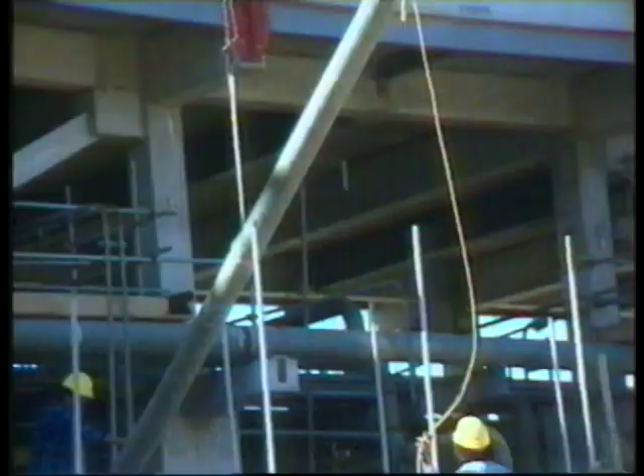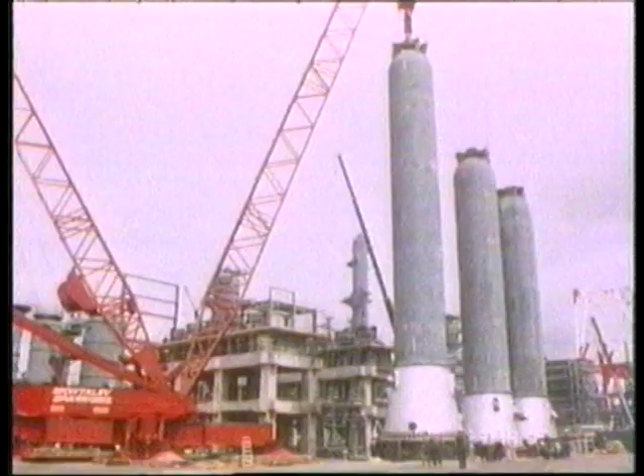A major expansion in 1983 saw a $1.8 billion investment in new plant and equipment. This huge revamp was required to increase the efficiency of the refinery and provide the extra products required by a growing nation. In 2002, the government announced new fuel quality regulations that would bring New Zealand fuels to a standard now required in other countries such as Europe, America, and Australia.

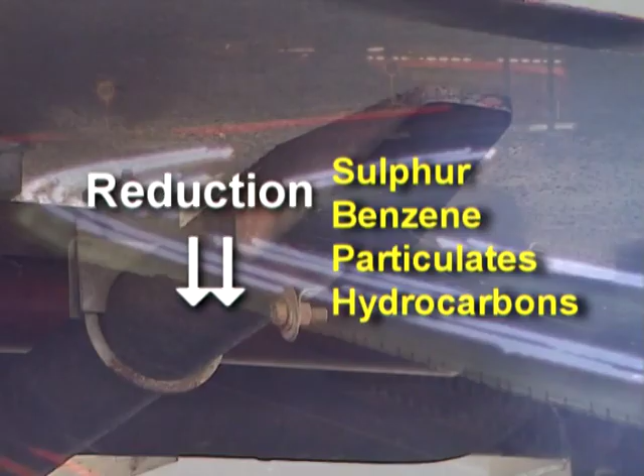The new specifications will apply to all diesel and petrol sold in New Zealand. They're aimed at improving air quality by reducing vehicle emissions into the atmosphere. They'll also allow the use of advanced engine technologies, offering the benefits of further emission reduction and greater fuel efficiency.

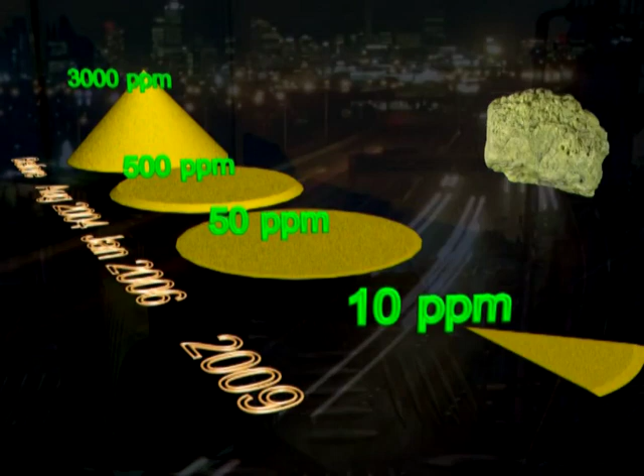The government announced that the level of sulphur in diesel would drop in 2 stages from 3,000 parts per million down to 50 parts per million by the 1st of January 2006. The regulations also contained a provision to reduce the diesel sulphur content further to 10 to 15 parts per million by 2009 at the latest. Benzene levels in petrol would also drop in 2 stages, down to less than 1% by January 1st, 2006.

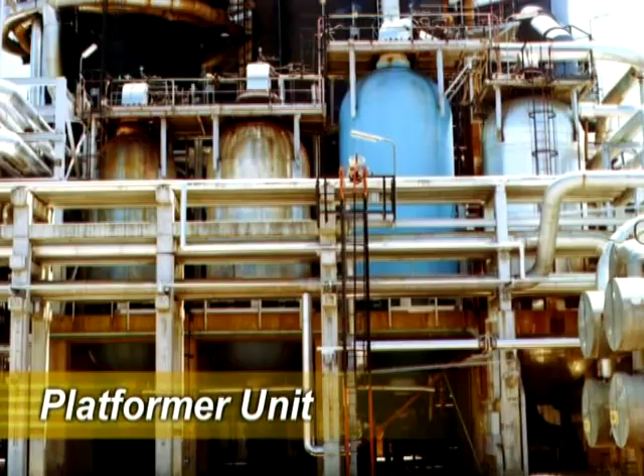The announcement of the new regulations posed a serious problem for the refinery. The existing plant and equipment was unable to produce fuel at the quality specifications required. The company faced a serious threat to its ongoing refining operation. The CEO, Dr. Thomas Singley, explains.

One has to understand in which situation the company was in 2001 and 2002. We knew exactly that we had to spend a lot of money to be able to produce the new specifications here at Marsden Point, an investment of about $150 to $200 million. That was pretty clear at that time. It was also clear that this investment would not provide shareholders with a good return.

So this was one of those situations where you have to make up your mind whether you want to stay in business or not. One also has to remember that the 1990s were a very difficult period for refineries across the globe. There was too much capacity everywhere, cost pressures were mounting, and several refineries had to close because they were unprofitable. It is understandable that in this environment, the board of directors of NZRC was not really keen to spend a lot of money with an uncertain return in a medium-sized refinery in a market which is relatively small.

There was another challenge coming upon us, and these were the Kyoto policies of the New Zealand government. It was announced that at a certain time in the future, a carbon tax would be introduced in New Zealand, and that would mean for the refinery an additional cost of up to $25 million per year. This is the same amount that we pay out every year on our entire payroll. No other refinery in the region was exposed to such a threat. So the challenge was pretty clear.

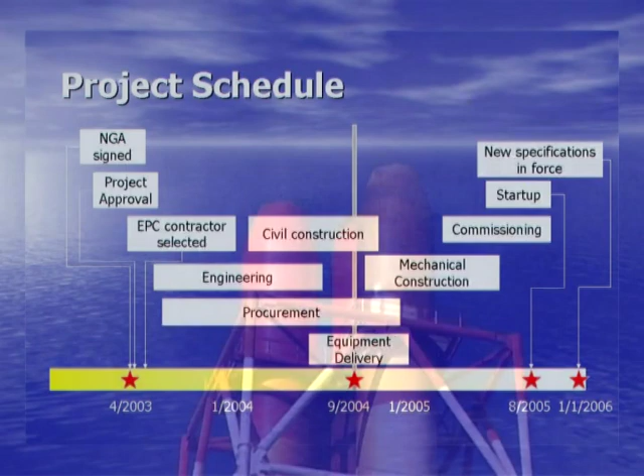Another team was formed to begin negotiations with the government on greenhouse gas emissions. This resulted in the country's first negotiated greenhouse gas agreement, exempting the company from the government's planned carbon tax and committing it to follow a pathway defining world best practice in energy management.

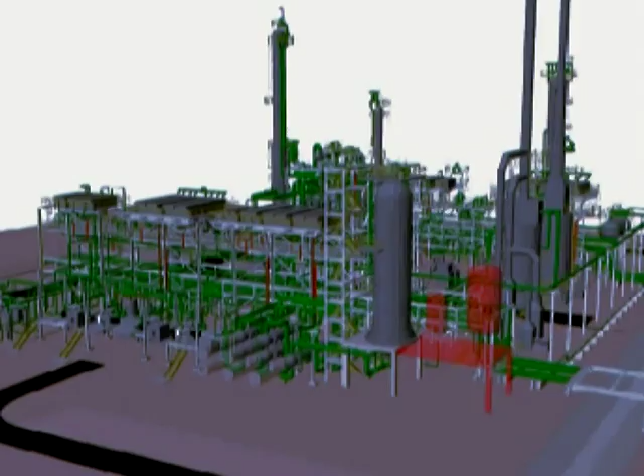By early 2003, management of NZRC presented their plans to the board. With the signing of the negotiated greenhouse gas agreement, the board approved the spending of $180 million to build the new plant. The Future Fuels project, as it became known, would require the construction of a new hydrodesulfurization unit to lower the sulfur in diesel, a benzene removal unit to lower the benzene in petrol, and a hydrogen separation unit to provide the extra hydrogen required by the new units.

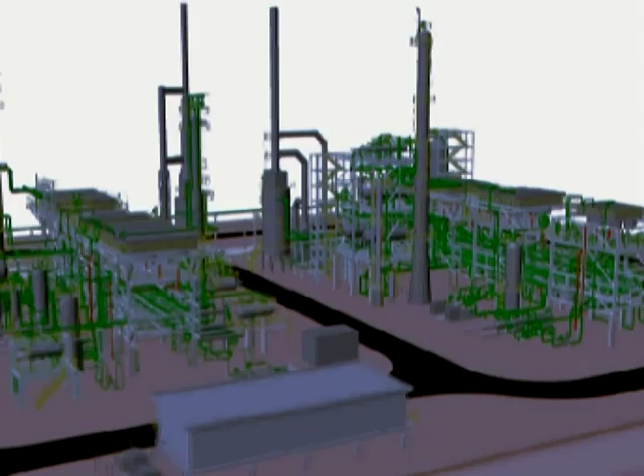Manager of Process Services, Rex Passau, explains how the new plants will work.

Crude oil contains sulfur, a naturally occurring component. In refineries, when they start to make fuels, they begin to separate the crude into different fractions. Those fractions go on to be made into fuels: petrol, kerosene to make jet fuel, gas oil to make diesel, and heavy fuel oils.

As we separate out each fraction, the sulfur that's naturally occurring in the crude oil comes with it. In the case of diesel, we get a significant amount of sulfur in the raw diesel extracted from the crude. The sulfur is bound into the molecules that make up the diesel. In the case of the hydrodesulfurizer, we use that unit to remove the sulfur from the molecules.

Raw diesel containing sulfur is pumped in from the tank farm to the hydrodesulfurization unit. The diesel, as it comes in, is mixed with hydrogen and then goes through a process where it is heated up and then onto a furnace, where we fire large amounts of gas to heat the material further.

The diesel and the hot hydrogen gas then go into the reactor, which contains 140 tonnes of catalyst. The catalyst is an unusual mixture of ceramic, nickel and molybdenum. In that reactor, we break open the diesel molecules and extract the sulfur, turning it into hydrogen sulfide gas.

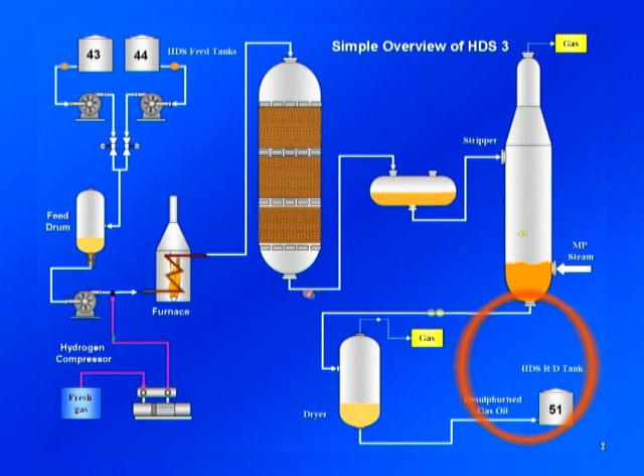The desulfurized diesel, hydrogen sulfide gas, and hot hydrogen exit the reactor and flow on out through some separation processes, where the hydrogen sulfide is removed, the hydrogen is returned back to the hydrodesulfurizer, and the clean desulfurized diesel is then pumped to storage for blending into diesel.

Crude oil also contains benzene. When a refinery goes to make petrol, it extracts a component called naphtha from crude oil, and all of the benzene in the crude oil goes into the naphtha.

Naphtha itself cannot be used to make petrol. It has not got the right properties. The refinery further converts the naphtha into a component that is good for blending into petrol. Unfortunately, as a side product of that, a lot more additional benzene is made.

As benzene is a hazard to human health, the refining company has built a unit to destroy the benzene in this stream. The stream of petrol component containing a large amount of benzene is brought into the benzene removal unit. Here it is separated into a heavier stream which can be sent straight away to blending, containing no benzene, and a light stream which contains all of the benzene.

This stream is then mixed with hydrogen, heated up, and sent to a special reactor containing 6 tonnes of catalyst with a lot of platinum on it to make the reaction occur. The benzene in that reactor is destroyed by mixing with the hydrogen.

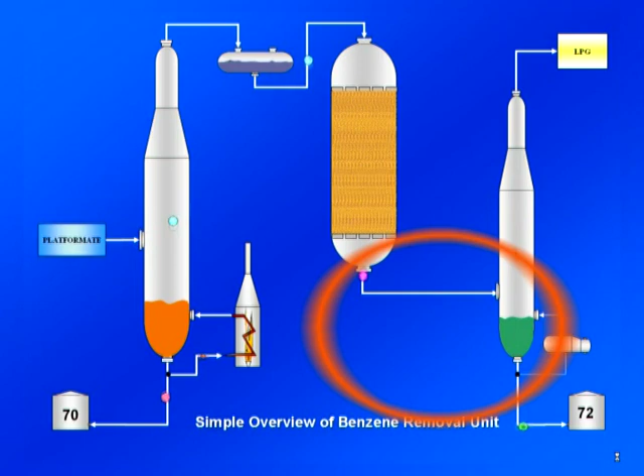The material that exits the bottom of the reactor is further separated, and the hydrogen that's not been consumed is recycled, and the component that's left, the light naphtha with no benzene, is sent away to blending to be turned into petrol. Both of the main processes in the Future Fuels project consume large amounts of hydrogen.

The refinery has a large gas stream with a high concentration of hydrogen in it. The concentration of hydrogen is not of sufficient purity to use directly in the new Future Fuels process units. As a result, a special hydrogen separation unit has been built.

It consists of large steel vessels containing a special membrane. The hydrogen-rich gas is brought into the steel vessels onto this side of the membrane. The hydrogen in the gas can go inside, work its way through this membrane, which works like a filter, travel down these little tubes and out the bottom.

The pure hydrogen is sent away to be used in the Future Fuels processes. The gas that is left can be sent off to be used as fuel or to be itself converted into hydrogen.

With the refinery's future assured, no time could be wasted. Foster Wheeler were the chosen contractor. They began work immediately on the huge task of assembling the workforce required to undertake this large project. A small village sprang up on vacant land near the site to provide offices and facilities for the workforce. Soon this small huddle of huts had grown into a bustling community.

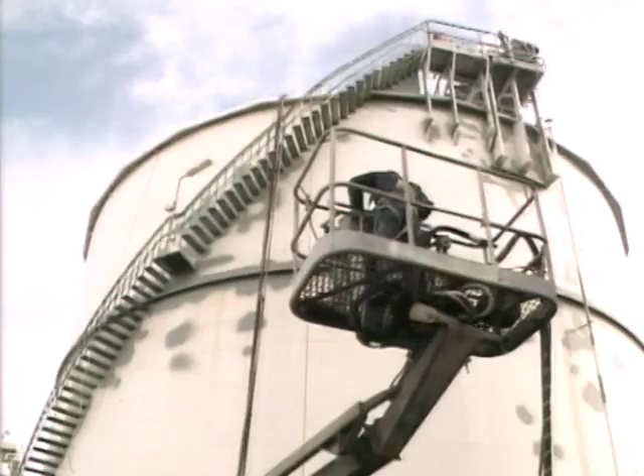The refinery prides itself on its safety record and sets very high standards of safe working practices for its workforce. It was imperative that these high standards were maintained throughout the construction of the new plant. Long before construction started, a robust safety plan was developed. An induction system was put in place to explain to the workforce the safety requirements for working on the site. No one was allowed to work on the construction team unless they'd been through the induction process.

Safety Manager Guy Buffy explains.

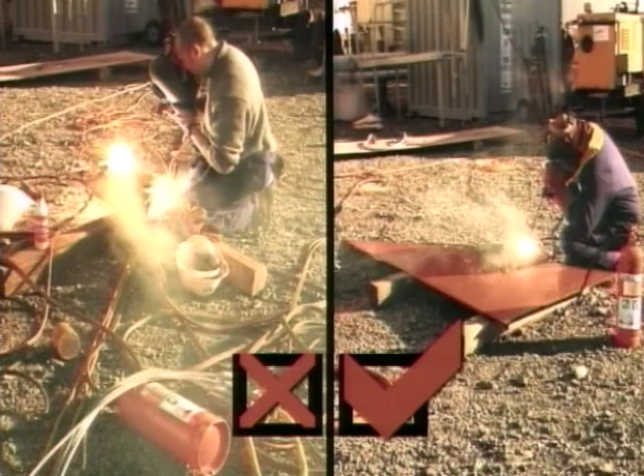The construction of the Future Fuels project commenced in August 2003 and will be completed in August 2005. During this time, the project inducted 1,500 workers with a peak of 700 during construction activity. The project itself and the safety team have worked continuously to improve the safety culture of the project. This has been achieved by a disciplined team approach with all the main contractors and a no-blame culture.

An open, honest reporting approach was applied, where near misses and findings from a safe visiting programme were proactively communicated and actioned. Early in the execution, we established a partnership agreement with OSH, who have supported our approach and performed timely audits. Engagement of the workforce was recognised as a key foundation in establishing the right safety culture for the project.

This was a significant task when considering the majority of the workforce had never worked within an operating refinery before. The integrated team developed safety initiatives including benefits and contributions to local charities, Manu Health Club, Bream Bay Swimming Centre and Ruakaka Lifesaving.

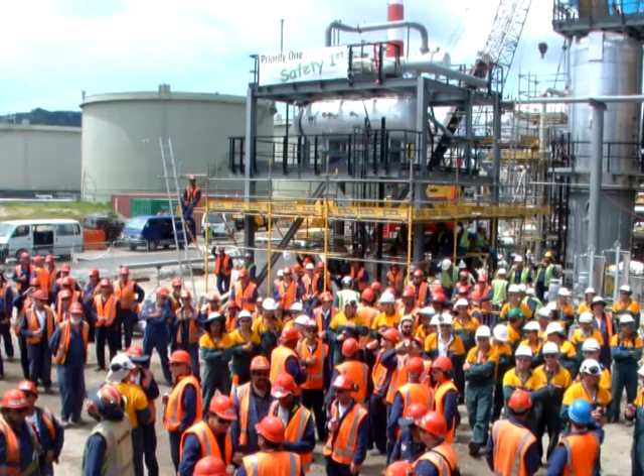Celebrations of safety performance were marked by the presentation of shields and certificates for best safety practice, issued each month. Safety was recognised at all levels: the individual, the team and the contractor.

Considerable effort was given to developing the behavioural aspects of individual workers through training, interaction, engagement, safety visits and hazard spotting techniques. Construction work on the new plant began in February 2003.

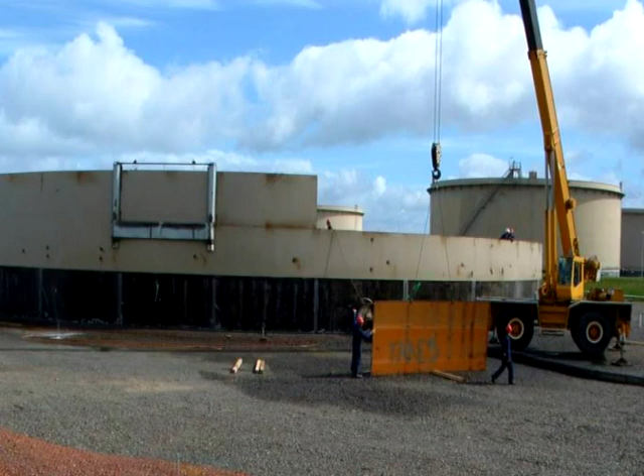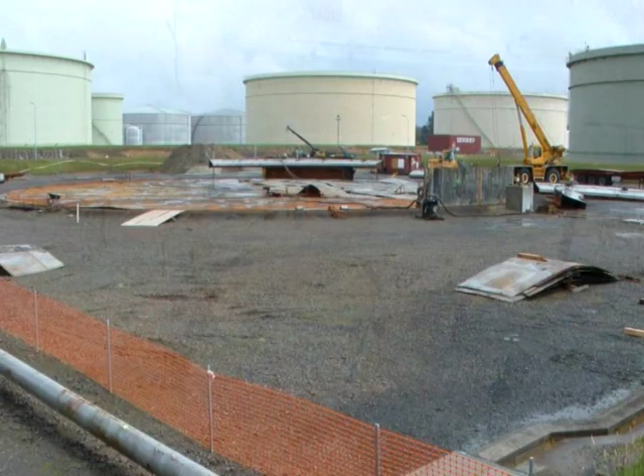The first job was removal of a large oil tank to make way for the new plant. This tricky task was safely undertaken by first filling the tank with water for stability, then removing small sections at a time, gradually lowering the water level until ground level was reached. With a clear site, construction proper could begin, and site foundations and civil work were soon underway.

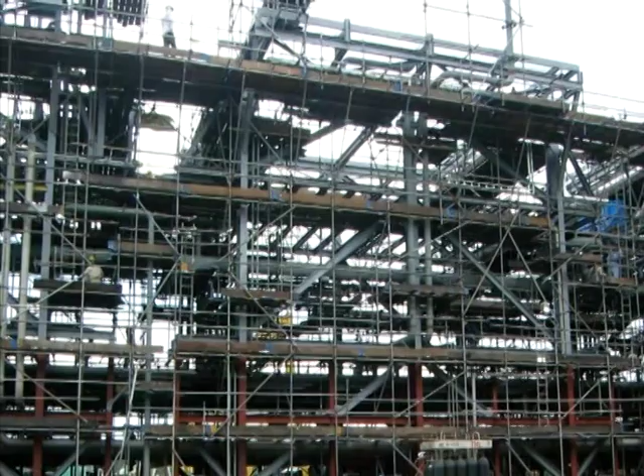Because of the short construction time required, the project team decided the plant would be built using pre-built modules constructed elsewhere. These would then be delivered to the refinery ready to be mounted onto the foundations, greatly speeding up the building process and requiring less construction staff on site.

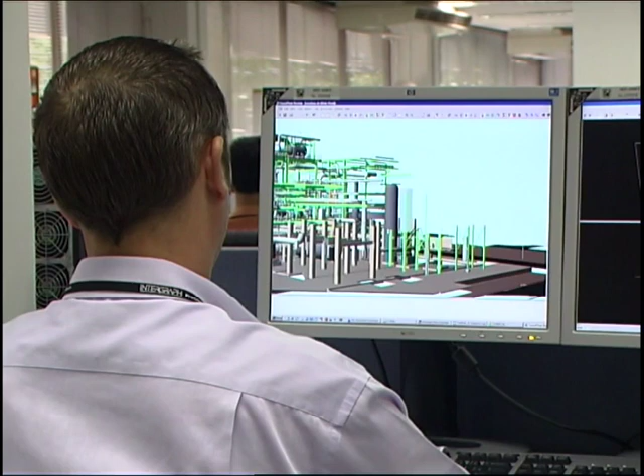The modules were built in Thailand under the supervision of Foster Wheeler International. A team of Thai engineers worked hard in Sriracha, designing and building the pre-built modules. A special computer-based model was developed to assist the design and construction process. Project manager Tom Lopnow explains.

The idea of the modules - Foster Wheeler has done this before on several other units. I personally have done it on another project here in New Zealand. The modules take man-hours away from the field and put them into places like shipyards, where this was done in Thailand. And it gives you quick parallel construction.

While we were putting in foundations, they were building the modules, whereas typically in normal construction you'd build the foundations and then build the modules off of those. Here both were done simultaneously. When the modules arrived, the foundations were done and set, so you get instant progress because you've done things in parallel. It helps expedite the project, and in this case also helped on the cost side because the Thai yards were less expensive.

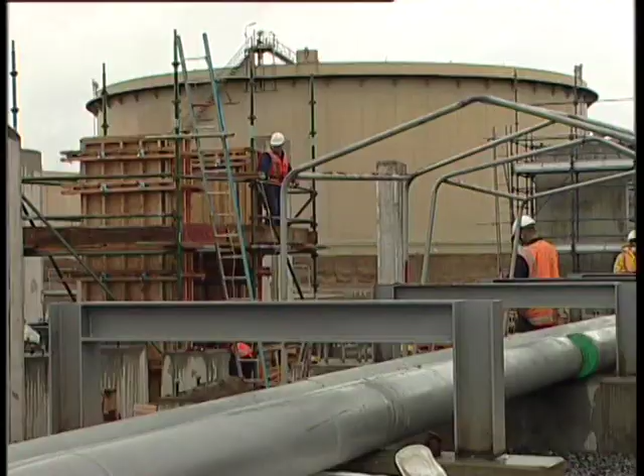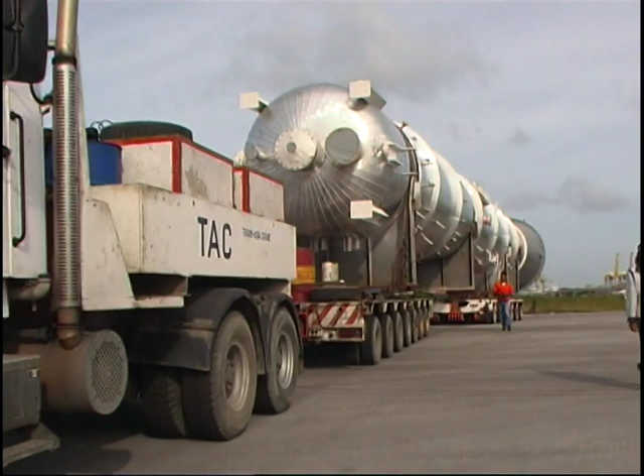Work continued on site in readiness for the arrival of the modules. The foundations were poured, and the heavy concrete structures required to hold the modules began to appear all over the site. In Thailand, the modules were all completed. At the port of Laem Chabang, they were lined up ready to be loaded onto the ship that would transport them to New Zealand.

The Happy Buccaneer was a purpose-built ship designed to carry heavy loads of up to 35,000 tons. She had already loaded the new HDS reactor in Japan and some heat exchanger equipment in Indonesia. Her two giant cranes were soon in action, loading the rest of the cargo in Thailand.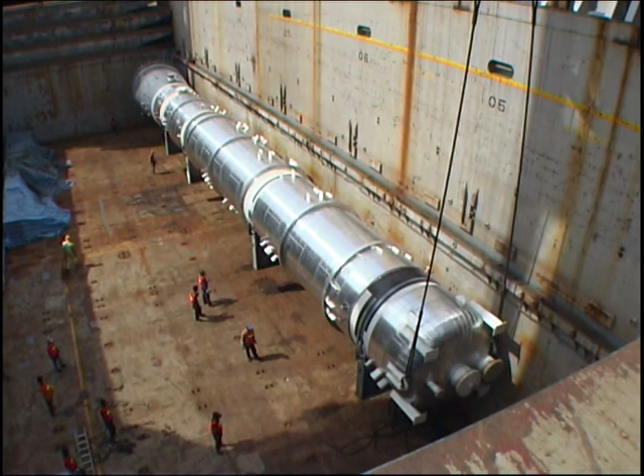The first items loaded onto the ship were the columns and reactors for the new units. Due to the size of the structures and the delicate maneuvering required to lower them into the hold of the ship, the work was slow and painstaking. Piece by piece, it continued until the hold was full of the large, heavy equipment.

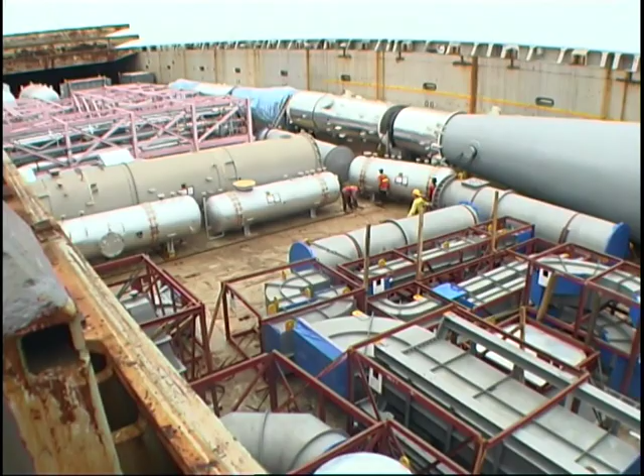Then it was the turn of the giant pipe rack modules to be loaded onto the deck of the ship. Once fully loaded, she set sail for New Zealand, where the construction team anxiously awaited her arrival.

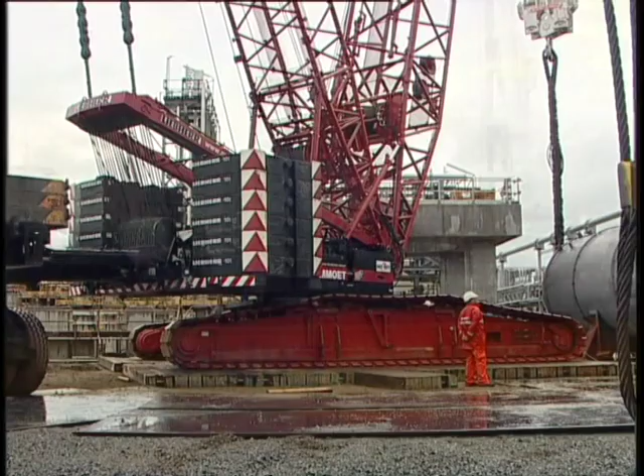At the construction site, all was ready for the arrival of the modules. A giant crane had arrived on site - one of the biggest ever seen in New Zealand, capable of lifting loads of over 300 tons. On the 20th of September 2004, the Happy Buccaneer docked at the Northport jetty close to the refinery and began unloading her precious cargo.

First to come off the ship were the pipe rack modules, followed by the columns and reactors. The massive pieces of equipment were loaded one by one onto special trailers, which slowly inched their way from the port to the refinery.

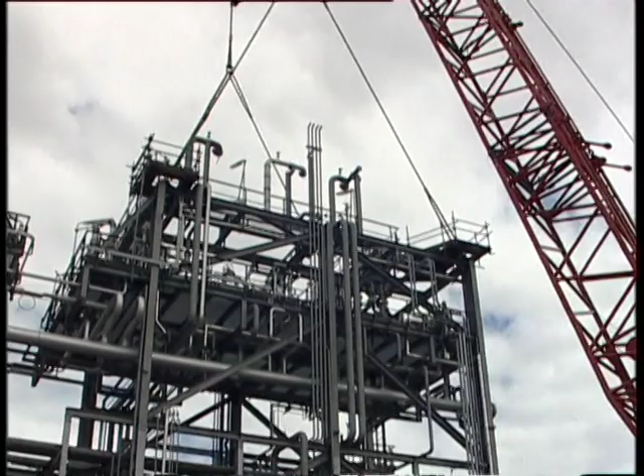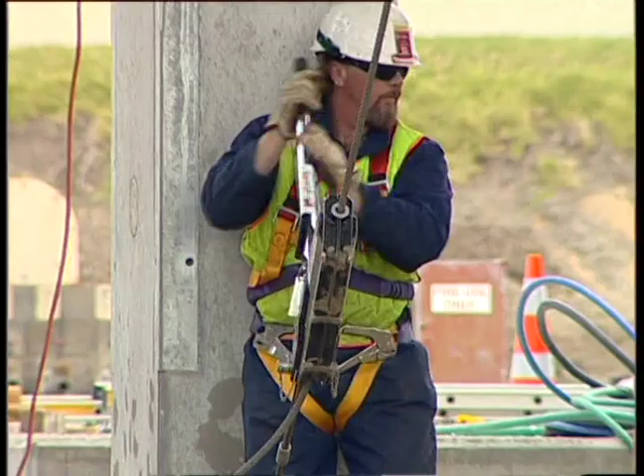The first task was to lift the pipe rack modules into position. The giant crane swung into action, carrying out the delicate task of lifting the heavy modules into place one after another onto their foundations. Teams of riggers pulled and tugged until the pipes in adjoining modules were exactly in line - such was the accuracy of construction that all the modules lined up perfectly.

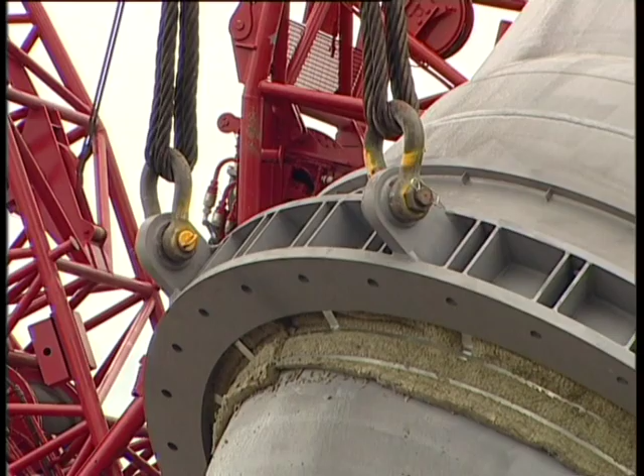It was then the turn of the columns and reactors to be lifted into place. With infinite care, they were slowly lowered into their foundations and bolted into position.

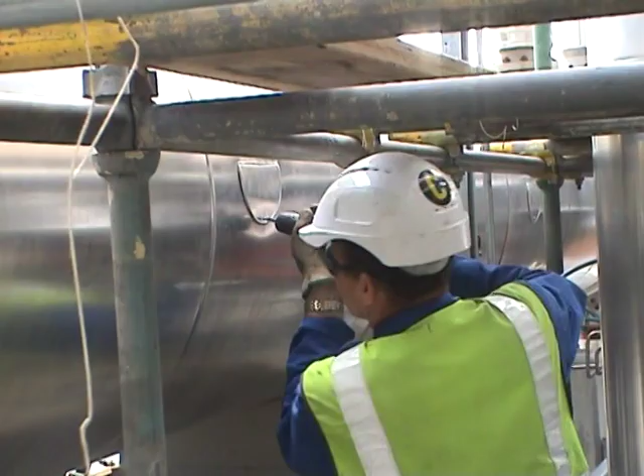The skill of the design and construction team was again evident as they all fitted into their foundations exactly. Like a giant construction set, the project took shape, and soon the refinery skyline was changed forever. By the start of 2005, the final phase of construction was underway, as teams of workers began turning the jumble of pipes and equipment into a finished plant.

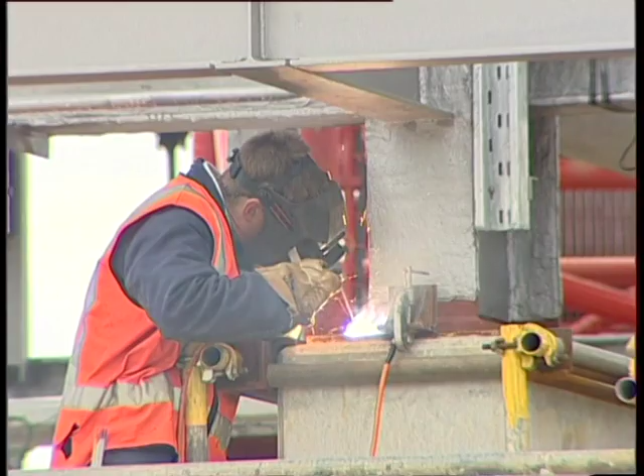Welders began joining up the pipes on the modules. Cables were laid to provide power for the pumps and equipment, and electronic signals for the complex instrumentation systems. Engineers began installation of the pumps and compressors. Scaffolding sprang up like a spider's web over the whole plant to allow the construction team to work safely at high levels. Everything was on track to complete the project by August 2005.

As the plant neared completion, Foster Wheeler Field Superintendent Ian McFarlane looked back on the project.

The construction challenge for Foster Wheeler has been a logistical problem, in terms of we modularised and supplied the spools offshore, i.e. in Thailand. Getting everything here during the heavy lift programme to meet the heavy lift programme was a success, and the commissioning-driven schedule has provided challenges that's taken us a long way to delivering on time, in the timescale that NZRC provided. It's been a pleasure for Foster Wheeler working on this job, and we look forward to continued success with NZRC.

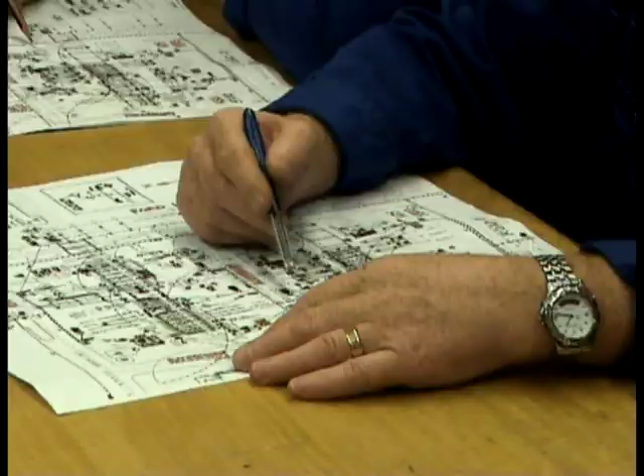Training is a priority on all projects. It's the construction team's job to build the plant, then hand the completed project over to the refinery staff who will be operating and maintaining the new units. Throughout the project, the focus has been on ensuring that the handover would be as smooth as possible.

At a very early stage in the construction, a dedicated team of operators were assigned to the site. It was their job to familiarise themselves with the new units and to provide operational advice and help to the construction team. These operators and a team of trainers arranged in-house training courses for the many trade disciplines in the refinery, to ensure that all involved would have a full understanding of the startup and ongoing operation of the new units.

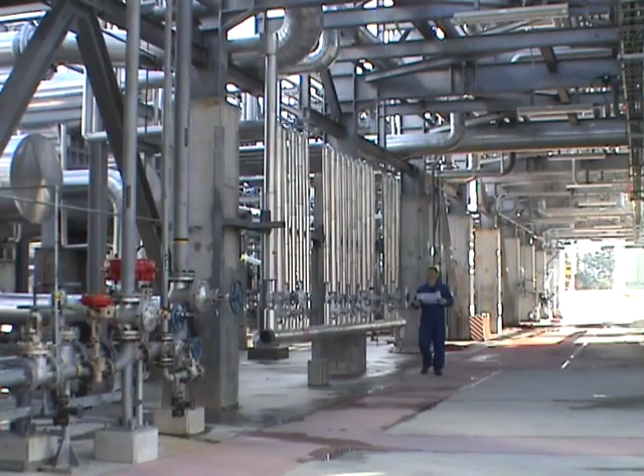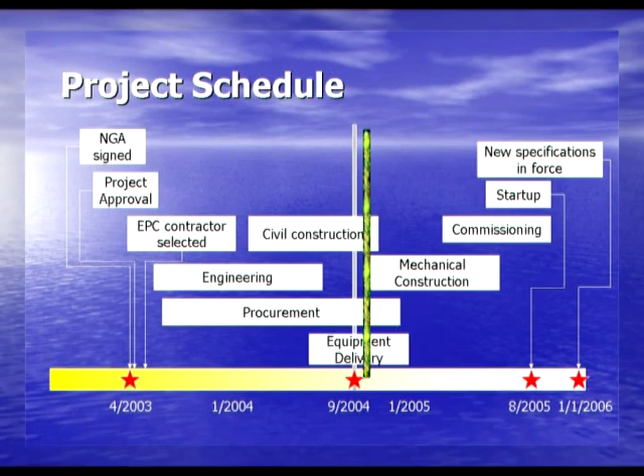During the startup phase, each line and piece of equipment was checked and double-checked, everything ticked off on checklists to ensure that nothing had been forgotten. Only then could the new plant be livened up. Steam, nitrogen, water, fuel and oil products, the very lifeblood of a refinery, all began to flow into the pipes and vessels of the new units. The Future Fuels project was ready for startup.

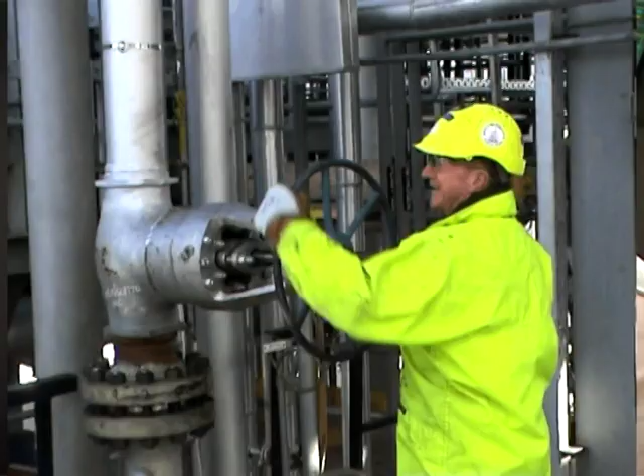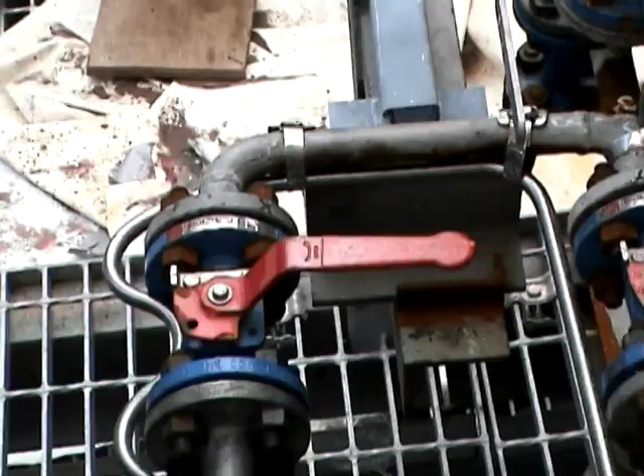Copy D block. You guys, we have confirmation from off plots. Booster pumps are online and we can open the main feed valves to HTS3 and the BRU. Okay guys, yeah, we now have feed into the unit and we have a rising level in our surge drum. We can stand by to start the main feed pump.

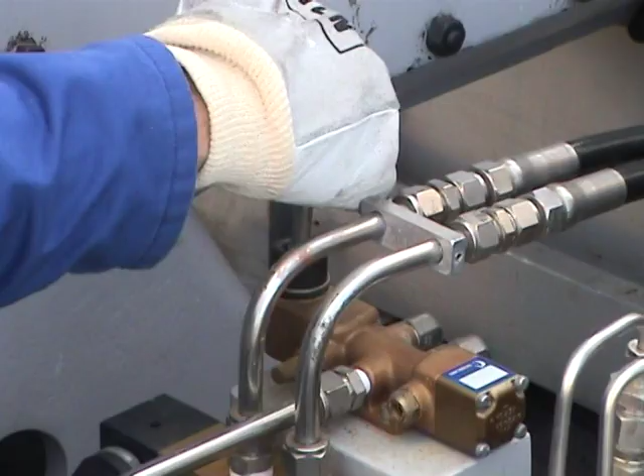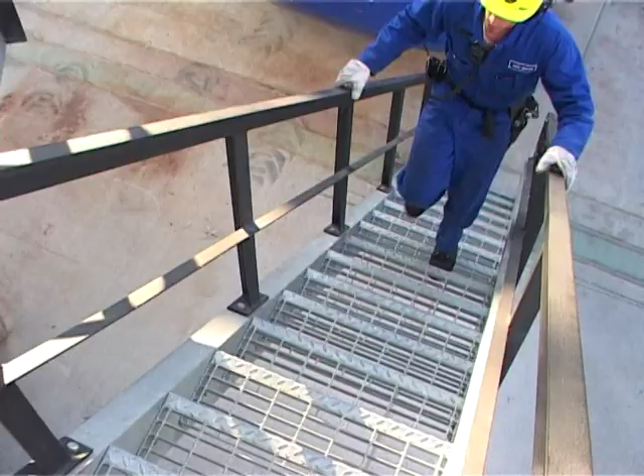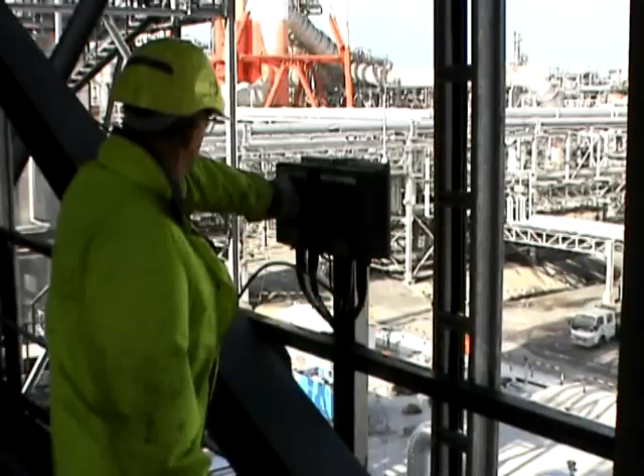Looking good fellas, start fresh gas machine. Copy D block. Okay guys, can we please start the furnace? Yep, D block. We can confirm now rising temperature in the reactor. Stand by to switch on overhead cooling fans. Gentlemen, reactor temperatures are now at normal running conditions. We are making low sulphur diesel.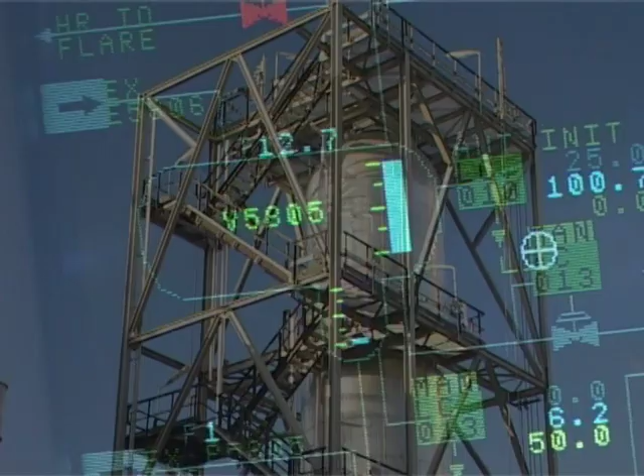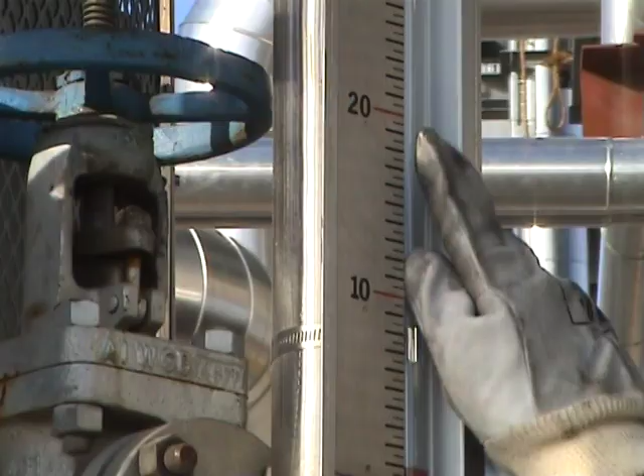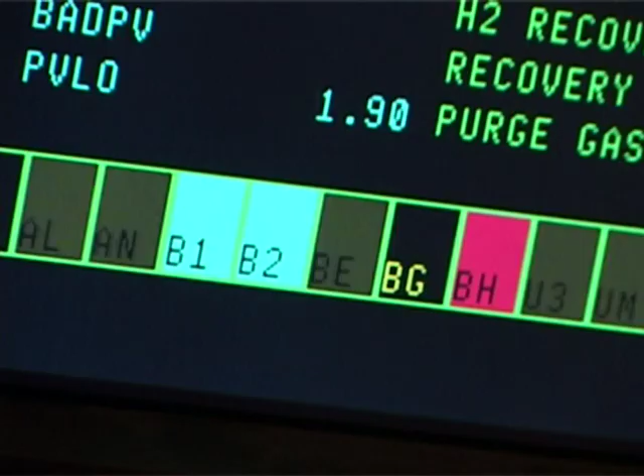You guys, we have a rising level in the splitter. Can I have someone confirm that level for me, please? Guys, thank you for that. We now have feed to the reactor, the BRU. Okay guys, we have full reaction temperature reached in the BRU. And we can confirm benzene reduction has started. D-block operators, can we sample our products please and have them sent to the lab for testing?

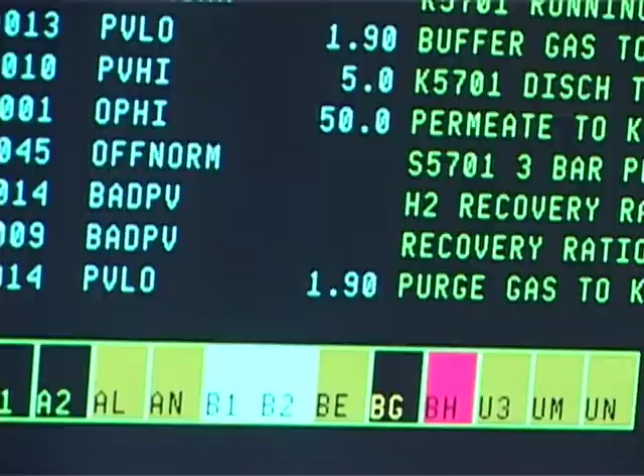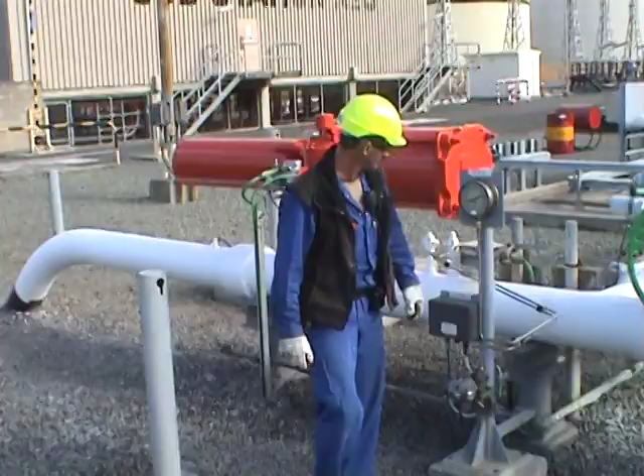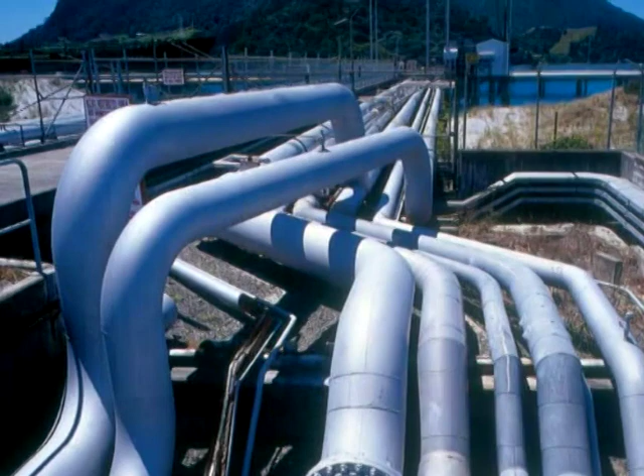D-block, lab results confirm all products are on grade. Can we now switch our rundowns please to tankage? Panel to tank farm operators, the Future Fuels are now blended guys and on grade, ready for delivery. Off plots, can we open up tank sides to pipeline and to jetty please? Hello panel, pipeline reset and ready for startup. Well done everyone. All products are on spec and delivered to the customer.

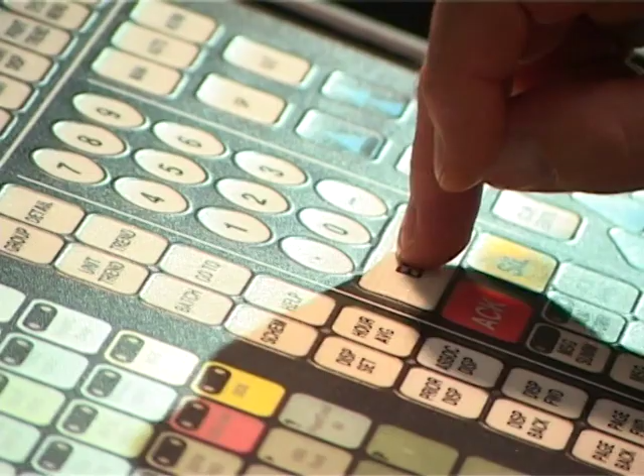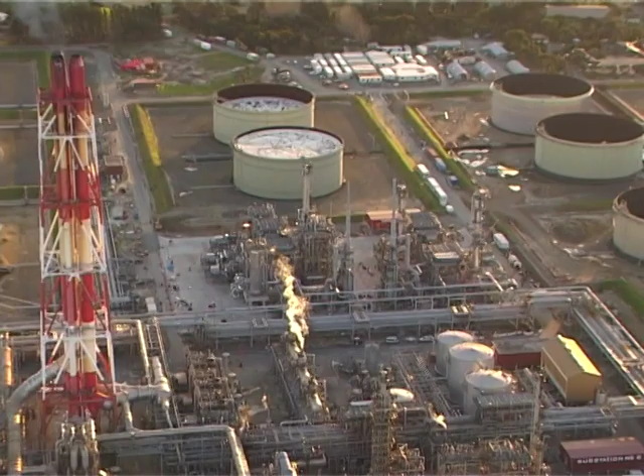This completes the remarkable story of the Future Fuels project. Born by the desire to improve the air quality in the country, the new legislation provided the New Zealand Refining Company with a major challenge for survival. The team at NZRC rose to the challenge. They conceived, planned and implemented the biggest project undertaken at the refinery in over 25 years, providing the foundation for its own future of continued and expanding operation.

Thomas Sengeli sums it up: We had many challenges to address and many issues to solve during the project. The team has managed to solve all problems as they came along. They did a fantastic job. Three years ago, they said that they would be ready in August and September 2005, and they delivered.

They also said that they would implement the project in a safe way, without incidents. And they delivered. And last but not least, they said that they would have to spend about $180 million on the way. And they delivered again. This shows that we can implement a major project at NZRC successfully. I thank everybody who has participated in this team effort. Well done. And I'm looking forward to the next major project at Marsden Point.